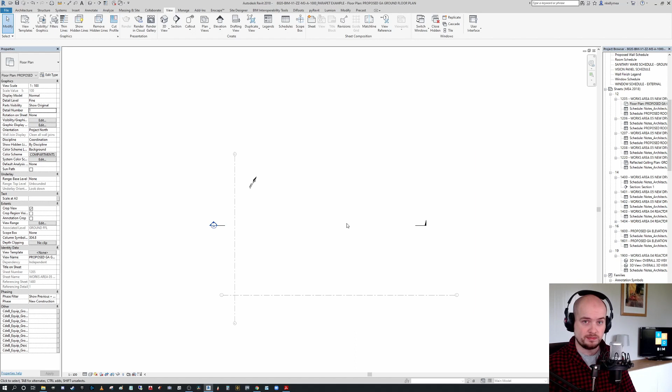So today I'm going to sit down and we're going to do a very quick modeling exercise. This is a blank file, there's nothing on it. I've just got 2 grids set up, a rough section and 2 provisional levels just to get me started. But what we're going to do is start developing out the model, and I'm going to use keyboard shortcuts for everything.

So the first thing I'm going to do is start developing a couple of grids. I'm going to press GR, okay? It's going to prompt me to save the project, of course. And you can see now that I can just go ahead and at 6 meters, pop down my first grid.

I'm going to change that to B, okay, and then I'm going to set that. I'm going to press CO to copy, and then I'm going to click multiple and create multiple grids. And then again, I'm going to press the bottom grid, I'm going to type CO.

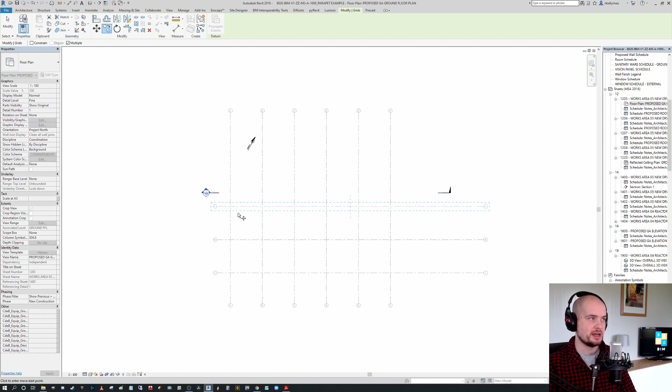Sorry if I'm looking a bit awkwardly down, I can't see around my mic. And we're going to go ahead and give it a 6,000 interval, 6,000 interval, and so on. We could see how quickly we can develop the grids. So that's excellent, now we've created a rough grid system for our project, and that was very quick altogether.

Now we want to create some associated levels. So I'm going to go double click into our section here, and I'm actually just going to click the extents of our grids up to meet the existing. And you can see that we have a number of levels here already.

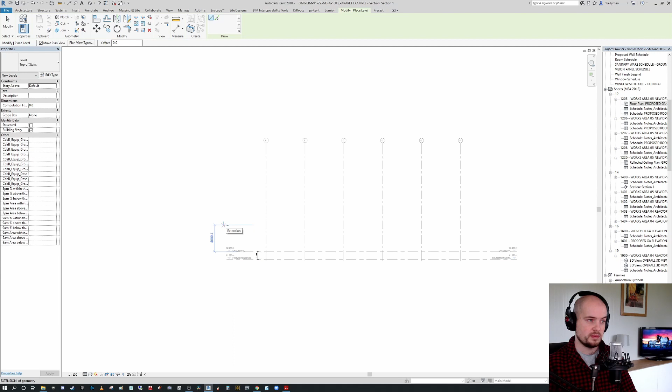So we can press LL for our keyboard shortcut, and you can see that it brings up the level top stairs. What we could do is, on our first, I'm going to press 4,000. And this has created a level for us. Once I turn on the correct level tag, you can see that this is called up. So this isn't going to be roof level, this is going to be first, let's say.

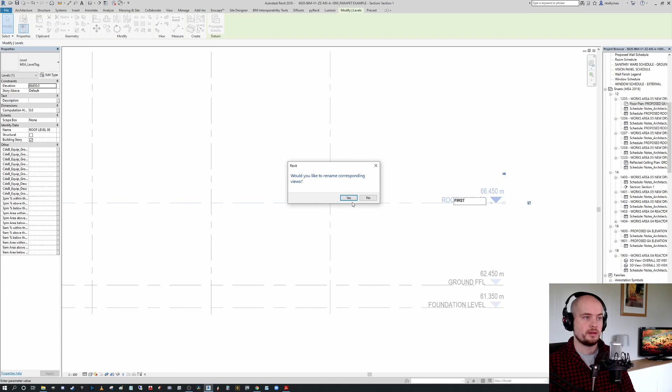And again, we're going to go LL, and I'm just going to go through that process 2 more times. I'm going to pick the right tag this time.

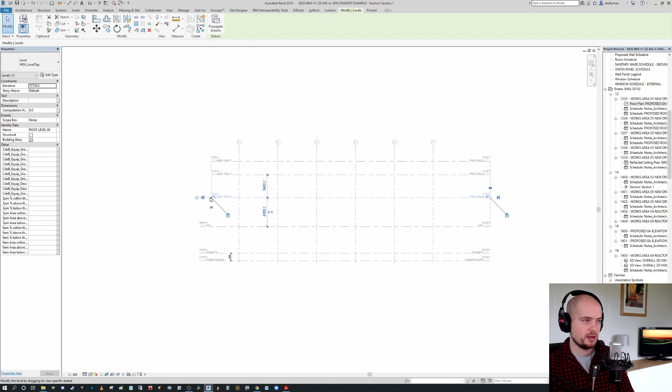I think I'll just do a parapet roughly as well. I'm going to expand out those extents there. And we're going to call this second. Name corresponding views, yes. We're going to call this roof. And we're going to call this parapet.

So you can see in a little over 2 minutes, we've created our complete project infrastructure, basically, both our grids and our levels accordingly.

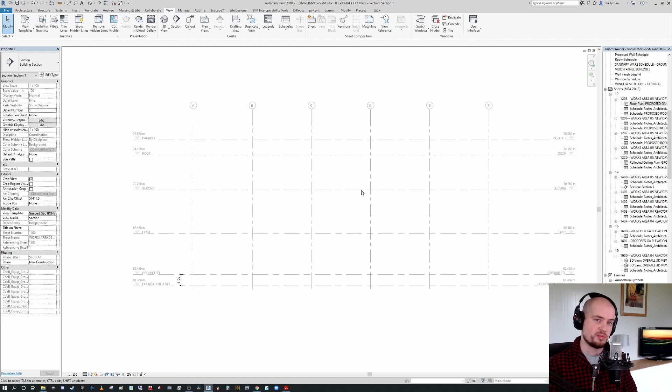Let's say we wanted to change the setting out of some of these grids, but we weren't sure what the relative setting out is. We can press DI and it'll bring up the align dimension, and then we can quickly create a run of dimensions across the grids.

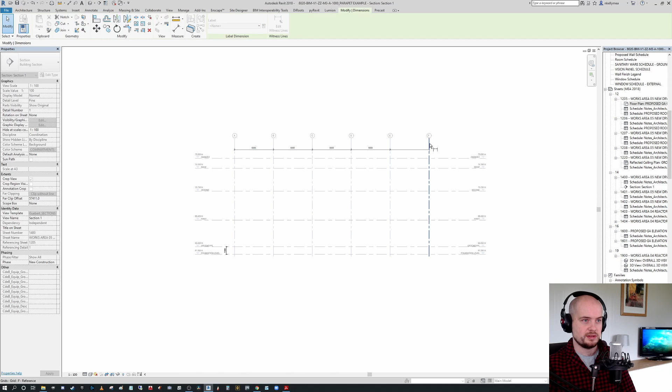Let's say I'm not happy with 6,000 there, so I can just select that dimension and change that. So you can see very quickly we can just press DI and bring up the aligned and all the other annotative dimension styles.

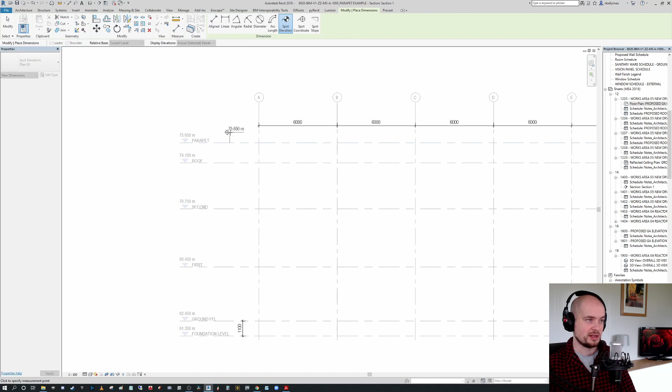We can also pop in our spot elevations as well. So I can select here and give it a spot elevation, and you can see that that's reporting the same value as the level.

So we've given our project its bones, let's say. So let's get into a bit of the modeling. I'm going to go to the 3D view here, and you can see that there's nothing visible.

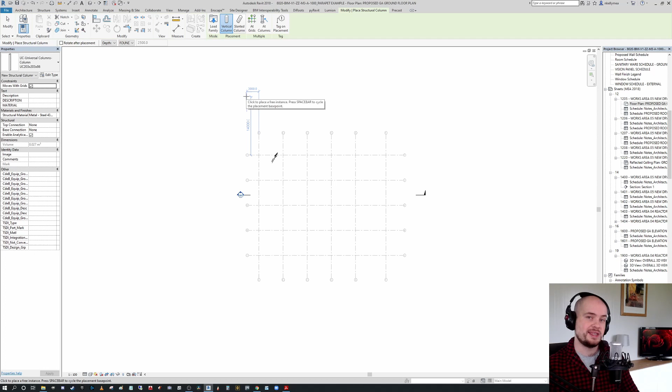So I'm going to go down to my floor plan there, and I'm going to press CL, and CL will bring up the structural column. On this, I'm going to select the column type that I want, and I'm just going to use 203s. I'm going to select at grids, and I'm merely just going to click and drag over all the grids there. What this is going to do is populate at the intersections of the grids. I'm going to press finish, and it's going to say that we haven't created any of the elements.

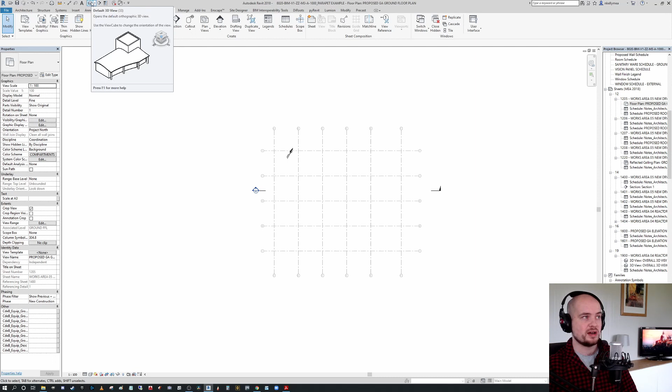The reason why is I didn't give it a top or a bottom extent. So I could go up here and press our default 3D, but you can see in a bracket after that it says 33. That's because I've given this a custom keyboard shortcut. So rather than going up into the dialog box each time, I can just press 33, and that will restore me automatically to my default 3D view.

So I'm going to select my columns here, and I'm going to take them from the foundation level up to roof level accordingly. So going back to the floor plan then, we could go ahead and populate with other things.

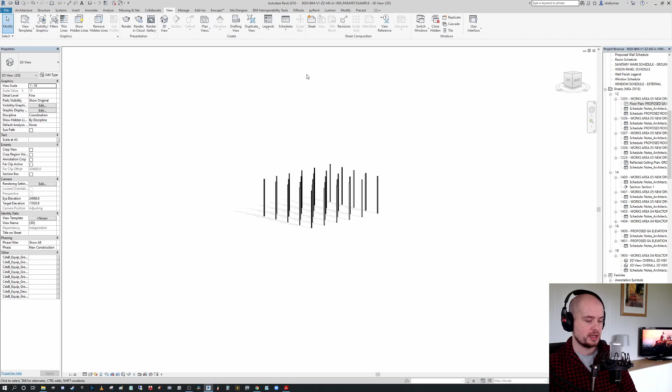So let's say going back to the 3D, pressing 33 again, I want to put in some foundations, right? So we're going to go ahead and place some foundations here. So I just want to put some isolated foundations.

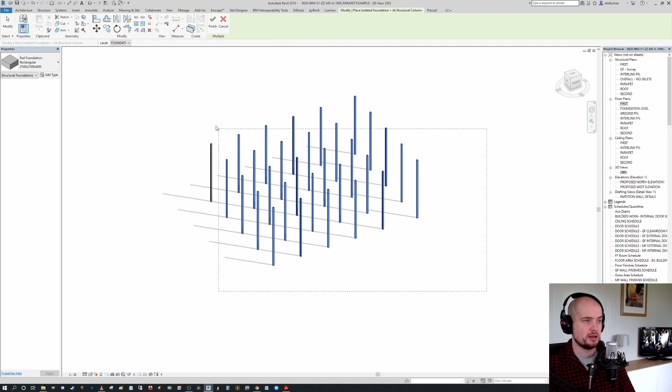So I'm going to press FN, and FN is a custom mapping. You can see that I can select at columns, and it's automatically picking up an isolated pad foundation. So I'm going to select at columns, select my columns, press finish, and it's placed it at the bottom of the columns.

Perfect. Now we want to start putting in our ground beams. So let's just say we go back to our foundation level view here. I've got some stray bits up there, my apologies, let me get rid of them. So we're on our foundation view here now.

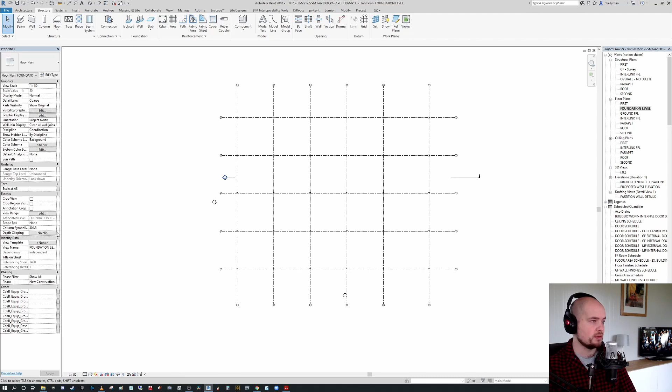And what we want to do is just edit our view range, I'm just going to give it minus 500.

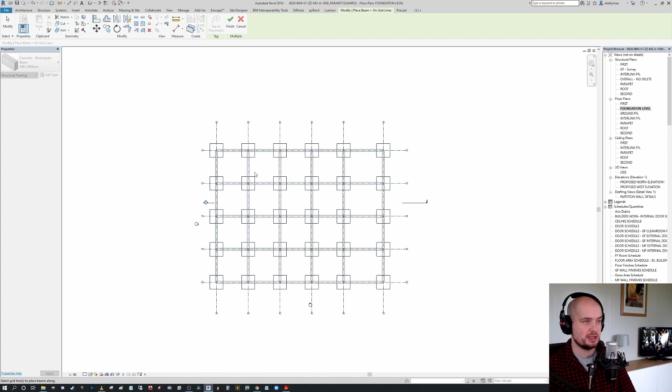Then we're going to press BM. BM creates a beam, and we're going to pick our rectangular beam there. This is a concrete beam. We're going to say on grids again, click from the bottom right to the top left, so we select everything that we cross, and you can see it automatically generates the ground beams. We're going to press finish.

You can see it joins the geometry with the concrete, so you get this very clean look. So we've got our ground beams in place, we've got our columns in place, and now we have our foundations all in place. We've done that very quickly.

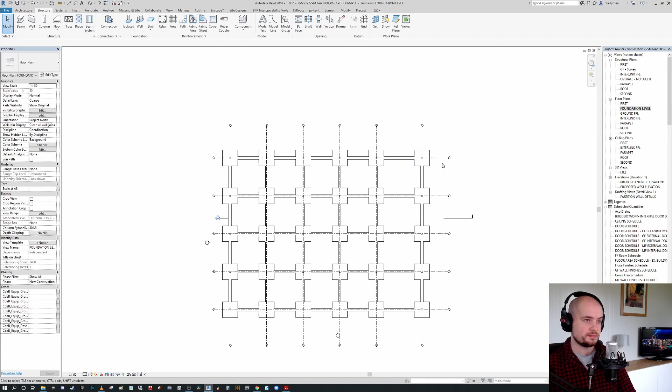Pressing 3.3 again to go back to our default. What we need to do is start populating our upper level beams. Closing that, we're going to go to our first floor. So we're on a structural first floor plan here, but let's say on our architectural or coordination plan we didn't have this floor plan generated. So I'm going to delete that.

Normally when you're creating a plan and you've got multiple levels, you need to go to View and the drop down - View, Plan Views, Floor Plan. But you can see in parenthesis afterwards I have PV in between the brackets.

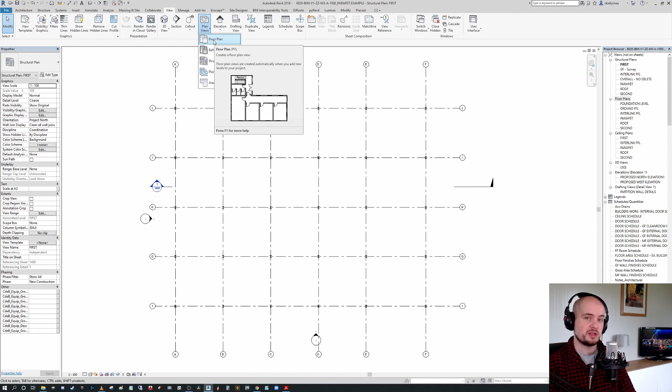PV is a custom keyboard shortcut that I've generated for creating a floor plan from a level. So I can just press PV, and it'll automatically bring up Create New Floor Plan. It'll select the level that doesn't have something assigned to it automatically, but I could turn off 'do not duplicate' and see all of them there. I press OK, and our floor plan is now newly created.

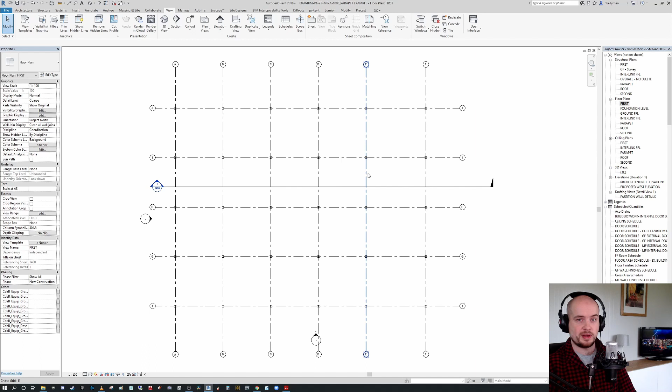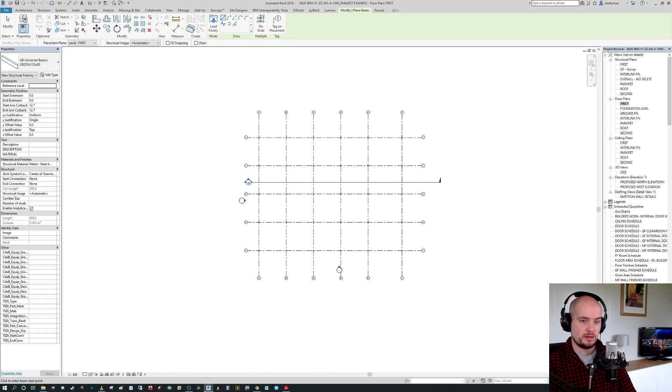So if I go to my view extents again, I need to give a minus value for these. And then we'll change that to fine so you can see the construction. So now we have our beams in place on first floor.

What we want to do now is start creating a beam system. If you go to your structural tab, you will see Beam System, and there is in parenthesis afterwards BS. But when I press BS, it's not going to generate the beam system for me. So there's something actually happening with the keyboard mapping there.

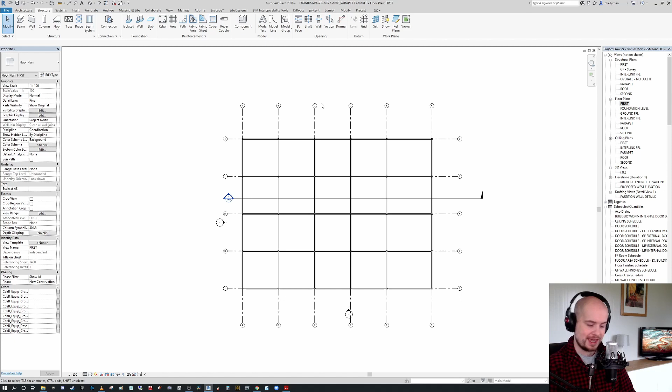To look at our keyboard shortcuts and understand what's going on with the keyboard mapping, we can press KS. When I press KS, it'll bring up all the keyboard shortcuts as they currently exist, and there are a lot of them. The majority you will see are not specified. The reason is to try focus on the 80% of tools you use most often, or the 20% of tools you use more often, so you get 80% more effective with them - hence the name of the channel.

But the idea is that you don't want to have hundreds of keyboard mappings that you have to remember for your shortcuts. Just focus on, if you're specifically working in one discipline, the default ones from the contextual menus figured out and your discipline-specific ones, and you'll probably be good to go.

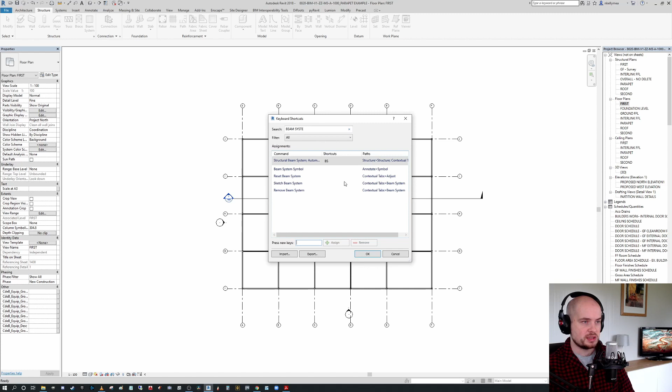So looking at this now, I want to type in beam systems, and you can see that beam system, our automatic beam system, is not getting picked up. So it is saying BS there, but it's not showing the tool. When I press BS again, you can see it's actually not picking up the tool. So there's an issue with the beam systems, and I just wanted to flag that very quickly.

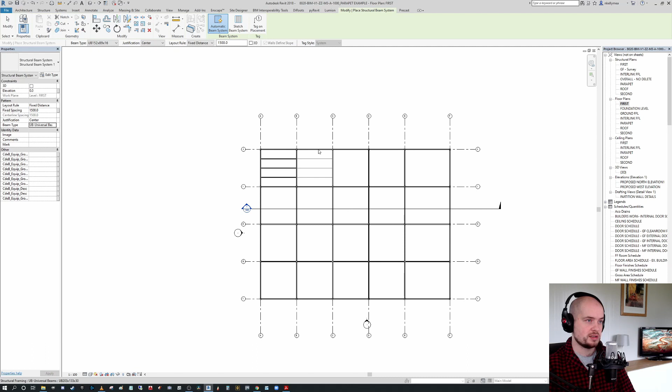So I'm going to press Beam System, I'm going to press Automatic Beam System. I'm going to set the fixed distance to 1500, and we're going to set our beam type to a 152. And we're going to go ahead and just start populating our beam system, and you can see how quick this is.

And apologies, I hit a duplicate there. We're actually populating our entire floor deck here very, very quickly. So now we've created our entire floor, and I believe that this beam system was the duplicate, was it? No, no.

Sorry, this is me being a little bit... okay, we have a duplicate in there, forgive me.

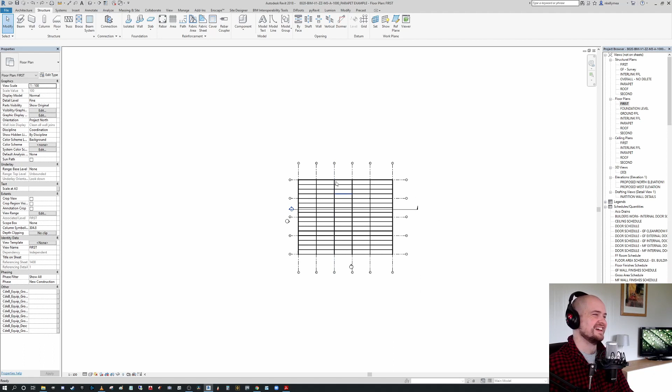All right, so now that we've created a rudimentary floor, we can go, okay, we want to array this up the various levels.

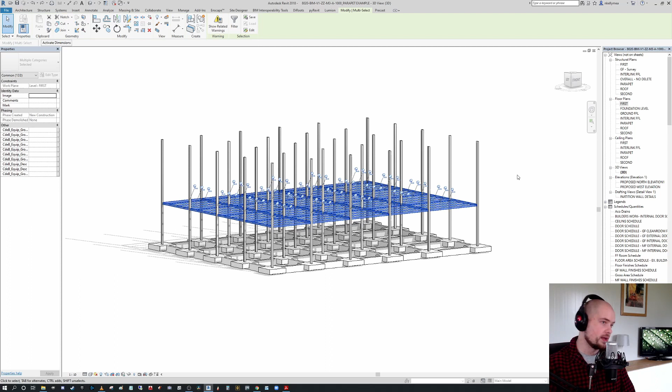Going to our 3D view, you can see how quickly we're modeling the geometry because we know our shortcuts. I can press this, click and grab this, and press Control-C, which will copy it to the clipboard. And obviously, we all know that when we go to our Modify tab, we can go to Paste.

We can say align to selected levels, align to same place, align to pick levels, all that kind of stuff. But what I want to do is create a custom mapping again, and align to selected levels in this instance.

So I'm going to press KS, and say Paste. We're going to say paste, align to selected levels, current view, pick levels, align to selected levels.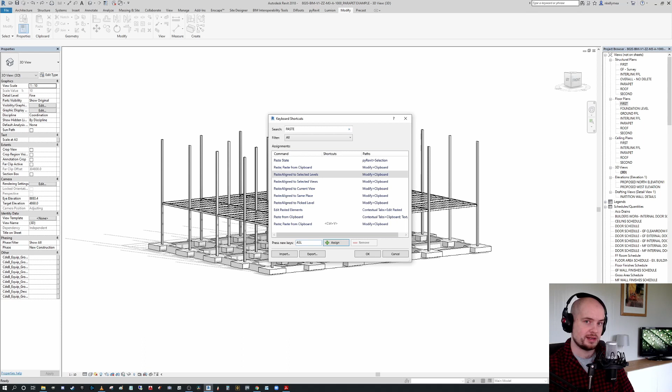I'm going to use a 3-letter shortcut, this one. I'm going to call it ASL - align selected level. I'm going to press assign and press OK.

So now I can press ASL, and it'll bring up the levels that I want to copy what I already have to the clipboard. I'm going to select our second floor and our roof for argument's sake, and press OK. I'm going to give it a moment to generate.

And that's where the duplicate was, up here. No, sorry, I have to go and get rid of all them now because that's going to bug me.

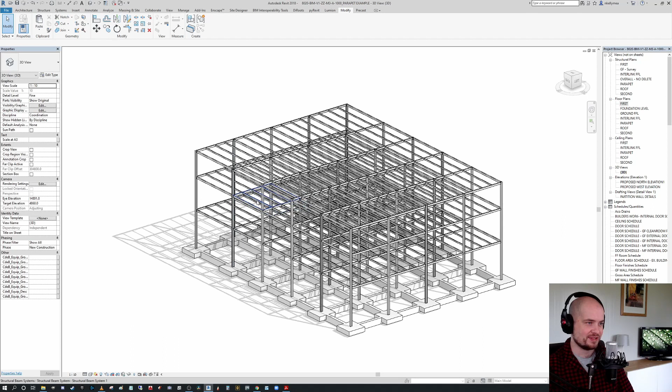So you can see how quickly we're beginning to generate all this information. Now that we have a very, very rough and ready structural frame together, it doesn't have a core, so it's going to need bracing.

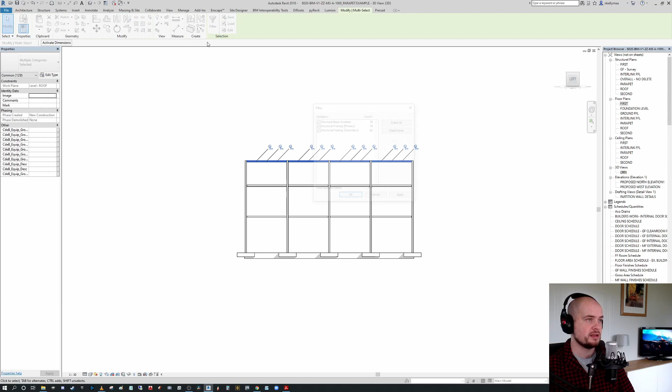So I'm actually going to go up here, and I'm going to create a selection here, and into my filters, I'm going to check none, and select my beam systems here. I'm going to press apply. Oh, sorry, we'll do that again.

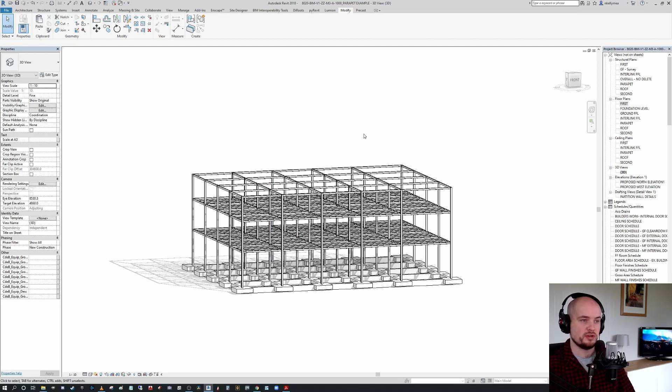Lost my selection. I'm going to filter, check none. I want to keep the beam systems. And I'm going to delete them, because obviously at our roof level, we don't have a floor deck like that.

What I'm going to do is turn on the section box here. Might be hidden in view. So I pressed RH to open the reveal hidden dialog. I'm going to unhide element, and then press RH again as a keyboard shortcut. We're going to spin around, and I'm just going to crop that up as such.

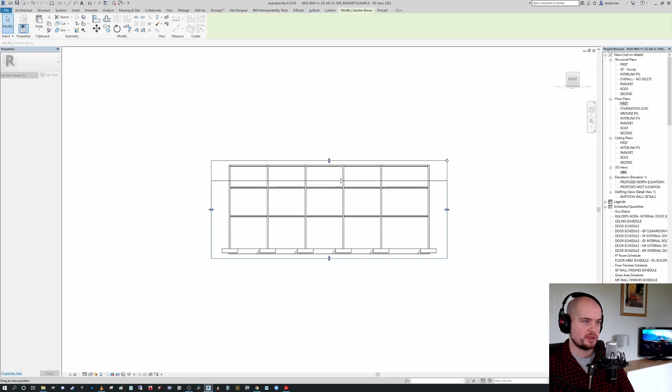Now what I want to show you is some of the snaps. If I press B, it's going to bring up a universal beam, but you'll notice we are in the modify place brace. So it'll call up the same structural framing members, but I'm actually placing braces now.

Here I'm going to scroll down, and hopefully I have a suitable member. I may not, I may have to use just some generic member for the moment. What do we have? We got PFCs. Oh, I should have L angles in here, but look, don't worry about it. We're going to use a small PFC here.

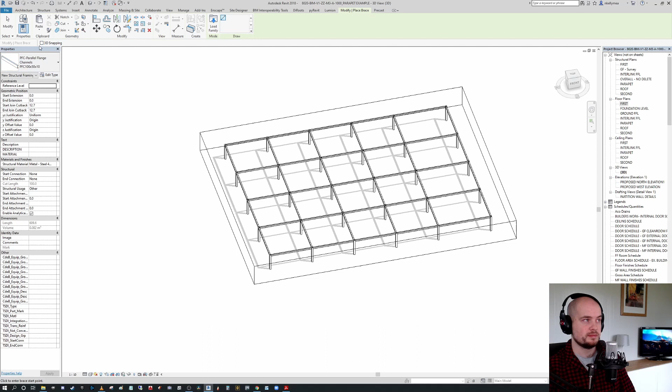What we can do is turn on our 3D snapping, and I'm going to show you how we can use our snap endpoints. So getting braces to snap can be particularly tricky. Sometimes when you're going up the vertical outside face of the building, it can be a real nuisance.

But what you can do is, in 3D snapping, it's going to pick up the analytical line at the top of the beam, but you can start using your snaps, and you can tell Revit which snap to connect to. So I'm not positioned anywhere on that beam really, it's picking up nearest.

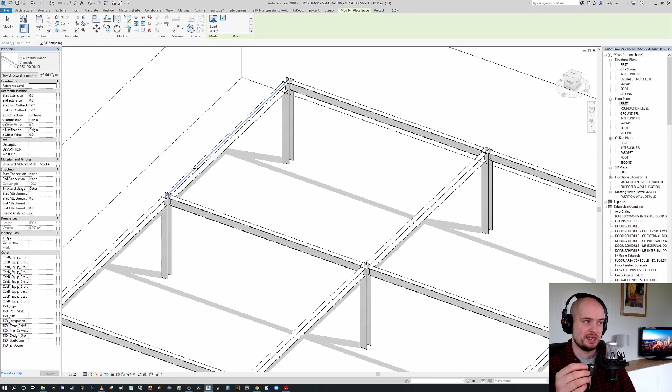But I can press SE, and you can see it'll snap to the endpoint. So I can press there, and then go over here again, let's say I'm going to pick up the column. I'm going to press SE, and it's going to snap to the endpoint of the column. Similarly, we're going to do the reverse here and here.

You can see that as I'm going along, I'm picking somewhere in the midpoint, like along the analytical line, but it's automatically, because I told it snap, going to pick up the endpoint. It doesn't matter where I'm positioned on that.

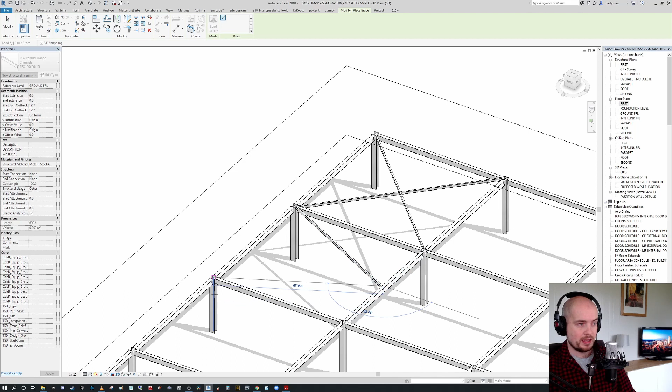If I press SN, it'll snap nearest again, and it'll follow my cursor. So I press SE to snap to the endpoint again. Now we know our braces are in plane and attached to the nodal connection at the top of the columns. This also works for midpoints. Let's say we have a K-brace. I'm going to press B to brace again, snap endpoint, then on our beam I'm going to press SM to snap to mid, then press SM again, and SE. You can see we can start generating our braces very quickly, going SE, SE, SE, SE, without tinkering around trying to force the connections.

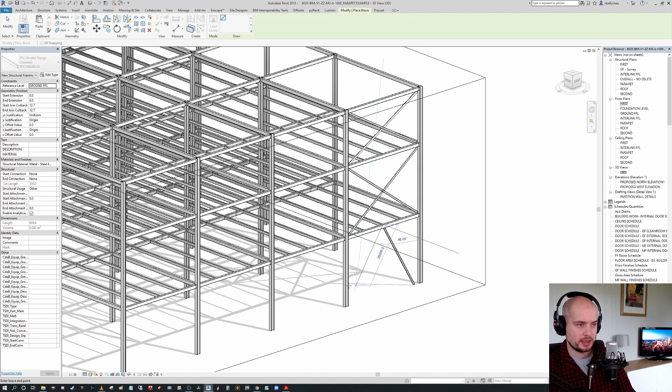The case will remain true in the vertical plane as well. So if I go brace, I can press SE, SE, SE, SE, snapping endpoints all the time, becoming very efficient. I can press SM on the beam, SE down to found, SM on the beam again. Apologies, SM and SE. Sorry, there we go. Now you can see we have bracing in place. Obviously this bracing arrangement is rubbish, but you get the idea.

You can see how expeditious this modeling process is once you understand your various keyboard shortcuts.

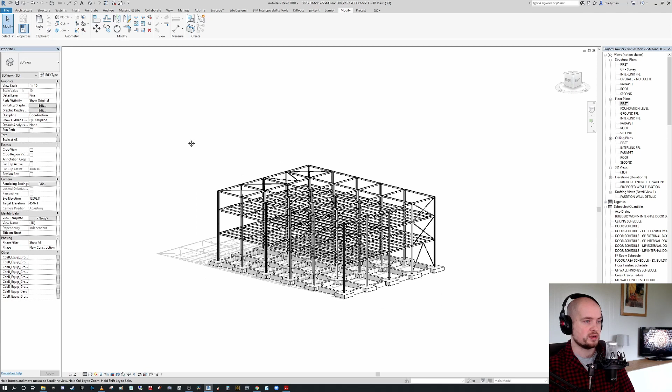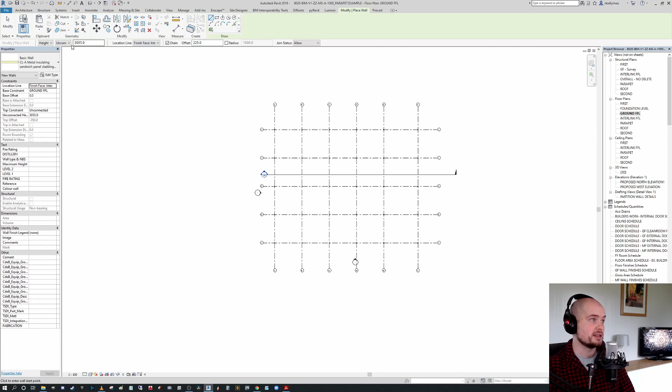Moving on from the structural side of things, I can go to our ground floor and press WA for wall. I can say finish face interior. I can give an offset value, let's say 225, just to allow for our cladding rail depth. I can set the height up to our parapet, and basically click the outside of this column.

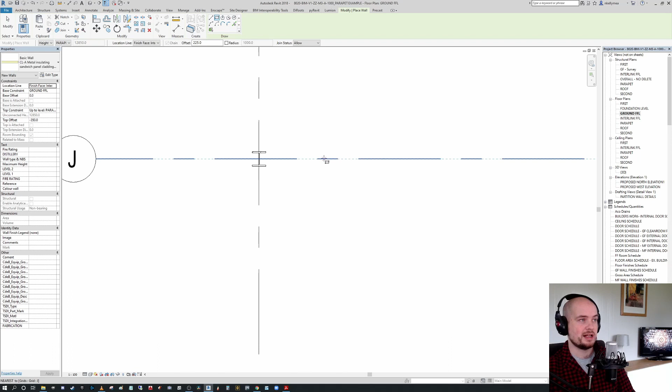I'm actually finding it hard to see where the edge of that column line is. So first things first, I'm going to put it on fine, and secondly, you can see the lines are quite thick, so I'm going to press TL, which brings up the thin lines format, so you can see the connection and geometry far clearer in the modeling environment. Pressing TL again will reverse that.

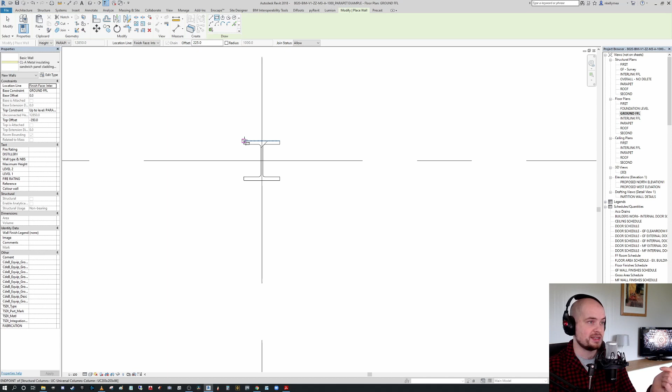So this is your print output, and this is your modeling view, which is more desirable, so you can pick up your endpoints very easily. As you can see, we can quickly generate that wall all the way up to parapet, and now we've encased our building.

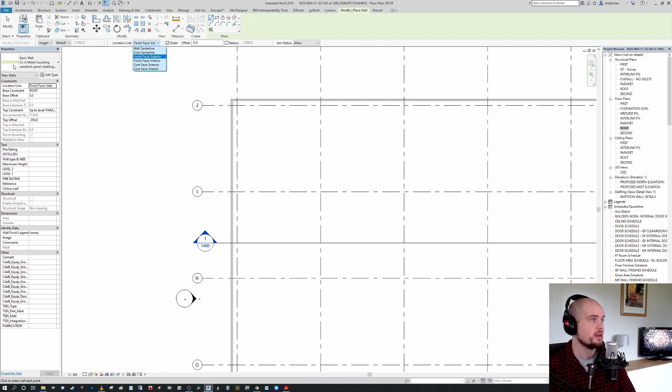Outside of that, I can go and do wall again, up to our roof level. I'm going to press wall again, WA, say finish face interior, then finish face exterior. And I'm going to go down to... give me one moment, we'll see if I can find something... internal parapet. There you go.

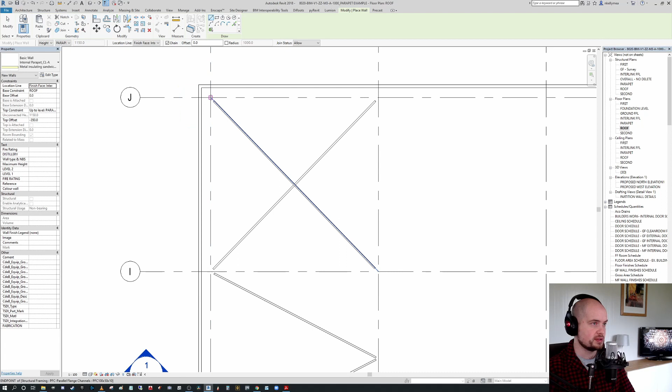I'm going to go to finish, and here I'm just going to select... I'm going to press the space bar to flip that orientation to here, for argument's sake. Then I'm going to do that. Now you can see I've got a full parapet construction already generated by just using 2 WA keyboard shortcuts.

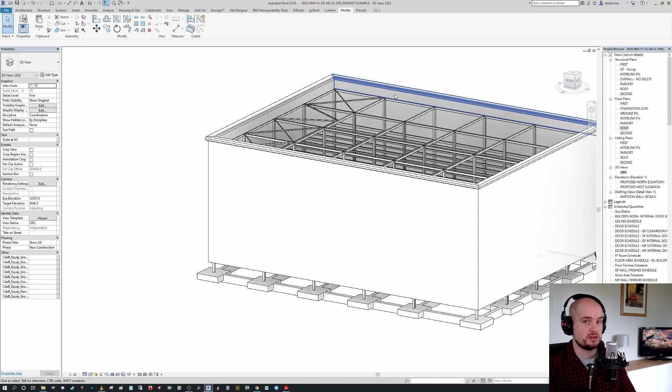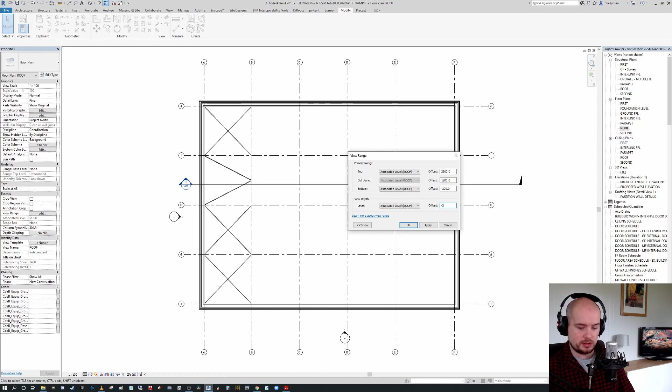Now there are other keyboard shortcuts that aren't accommodated. So going back to roof, if I went to roof and gave it a view range, my apologies, let's say -200 and -200. The reason you're seeing those braces is they're aligned to the midpoints and not the z-axis, I believe.

So I can come in here and press VG, which brings up the visibility graphics, to maybe hide the walls. Then I'm going to go down and select walls, pressing WA. Now I could go to Architecture, Roof by Footprint, or I could just press OR-F, one of my custom shortcuts, and it'll automatically bring up the roof by footprint.

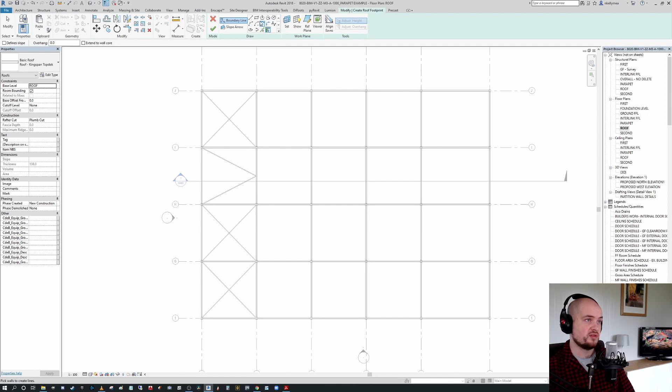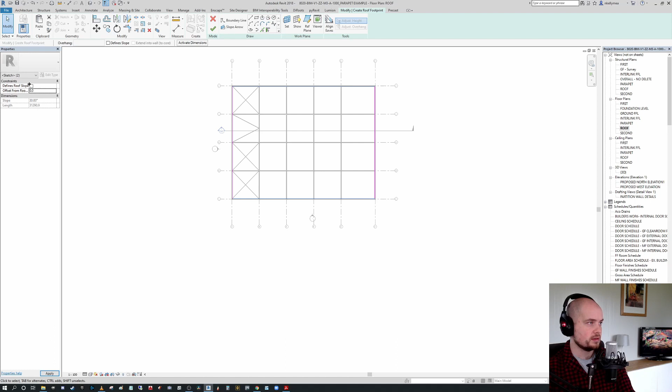Now I can just come in here and draw a roof very quickly, very rough and ready. I'm going to turn off these as defining slope, which define slope on either side here, and we're going to give it a slope of 6 degrees. One moment. 6. And we'll press finish.

Now we've got our roof, and 6 degrees may be a bit aggressive, so I'm going to go down here and just change it to 4 degrees. Now we've got a fully enclosed building with a structural frame. Similarly, we can go back to our ground floor, let's say.

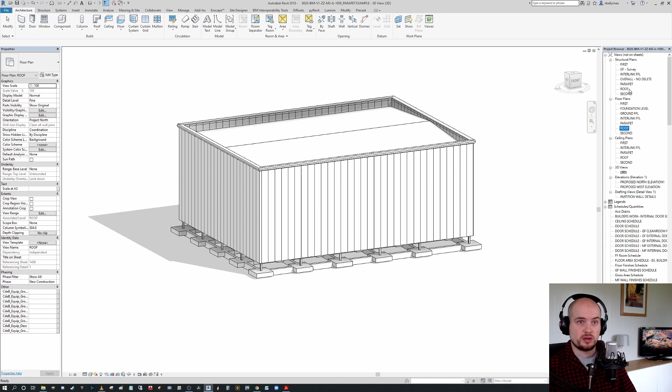I can press WA and select an internal wall type, like a partition, and start loosely populating some walls throughout the building here. Bearing in mind, obviously, that this is not a design by any stretch.

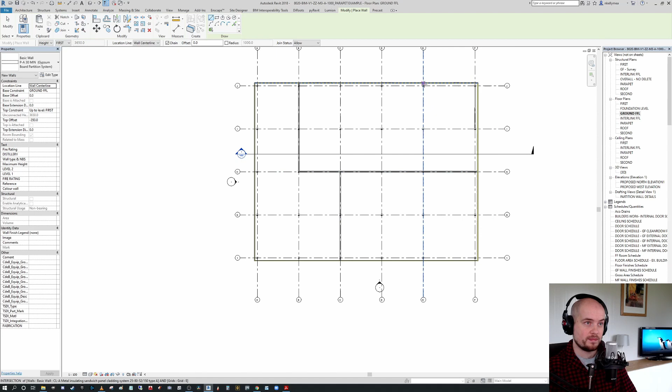Then let's say I wanted to place a couple of rooms. I can press OR-M, and you can see that it'll automatically start placing rooms. So you can see I'm not going around clicking the architectural tab or navigating through everything. I can literally just select and go.

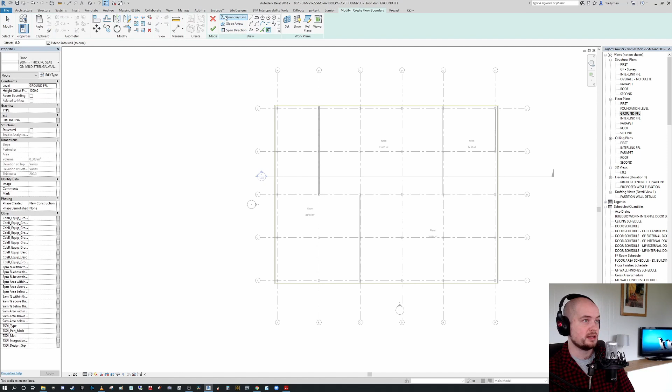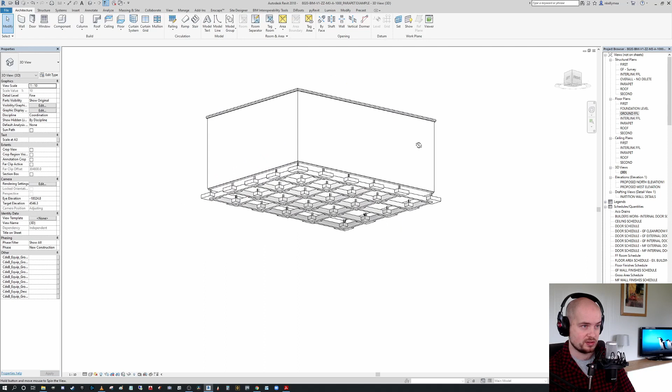Finally, I pressed FL, and that's brought up floor. Now I'm going to pick walls, tab select the boundary walls there, press finish, and press no. So I've got a floor in place now. You can see how quickly I'm getting through this modeling exercise throughout the project. It's very, very quick. I'm just going to change that down to 0 there, just to make sure it's correct. This is really, really quick to generate the information.

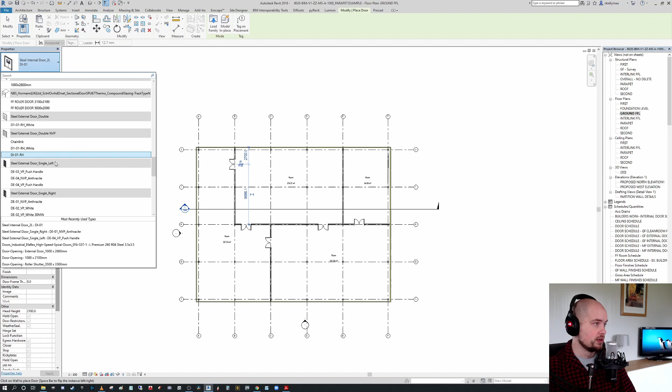Going again to our ground floor, I can press DR, and it'll start populating doors throughout very quickly. I could change that to some sort of external. Let's say I'll give it a rapid roller door on this face and on this face, and I'll give it a couple more.

Then I can go down again, press WN, and start bringing in windows. So you can see I've got viewing corridors. Let's say we've got viewing windows here, so I can press viewing window there. These are vision panels essentially. You can see how expeditious all of this is.

And I can go up here and press it all the way throughout. Obviously you can be quite a bit neater, but you can imagine that if picking the tool was one fifth of the time of actually implementing the use of the tool, then you're looking at a 20% efficiency gain. So that 13.36% estimate by the community is actually probably quite close to the true value of how much production gain you get. You can see just how quick all of this is.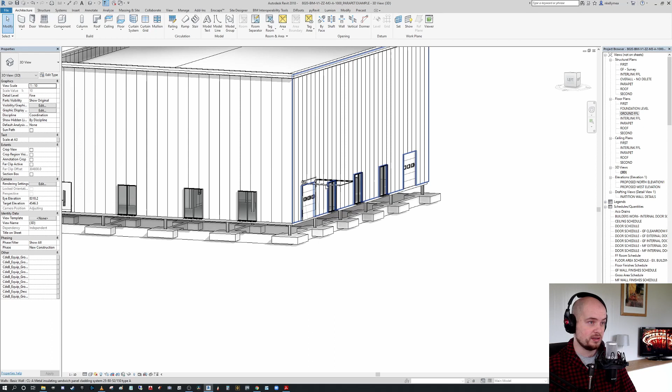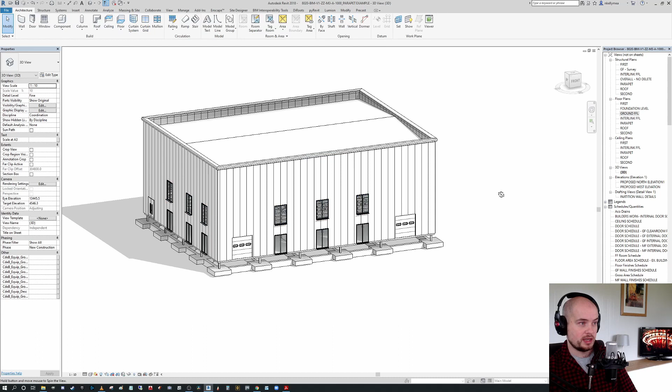We've got our building basically up and running. Again, I can select these, press SA, and then Control C. Then I can press ASL, and go to the first floor. Now we've matched our windows to our first floor. Again, ASL, and I'm going to go to second floor as well. So you can see just how fast this becomes if you learn your keyboard shortcuts correctly.

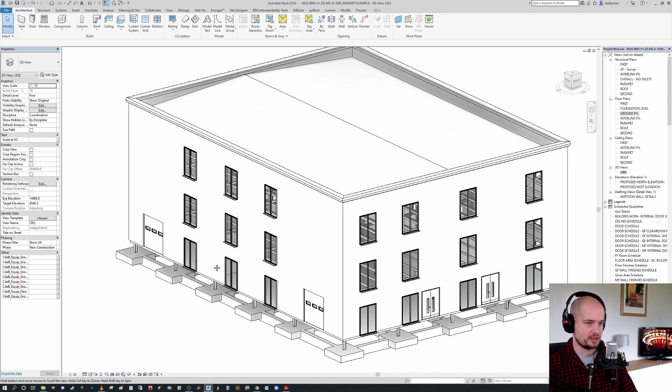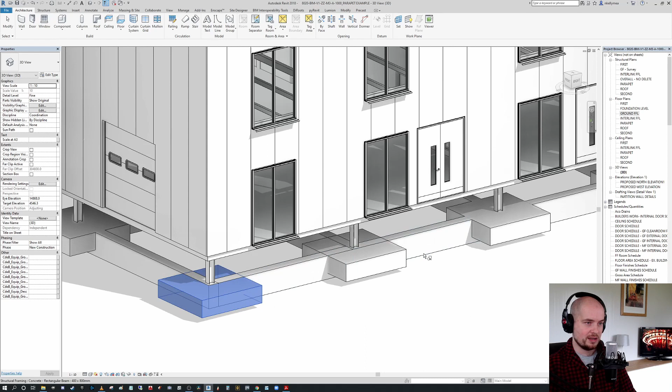A few of the other custom ones I particularly like: I use UJ to unjoin geometry, and you can see I can press this and this and this, and all these members, even though they were joined, have been given an unjoin condition, so now the materials are not amalgamating, they are separating. Again, I can press JN and just go ahead and start joining that geometry again, and everything becomes quite neat and presentable again.

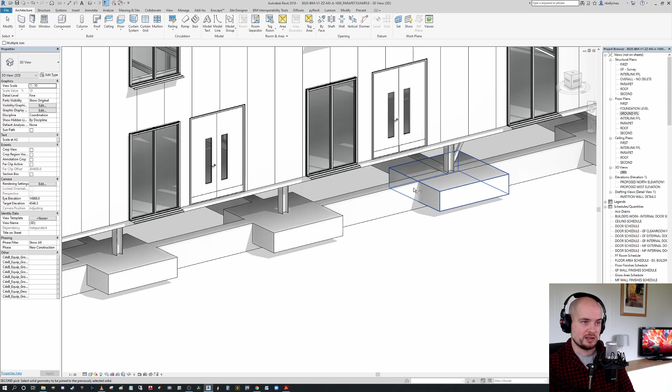You know yourself, you might have a rising wall detail or something like that, which is obviously absent from this model currently, but typically they need to merge with the footing materials and that kind of thing. So it's just a way of neatening up your presentation.

There's also other things like on the ground floor. If you press DL, it'll bring you into your detail lines, so you can start drawing detail lines—not that I recommend you ever draw detail lines in a plan view. Outside of that, you can also press TG, and this will bring up a multi-category tag, so you can just go around and start popping your tags. These are picking up the fire ratings on the doors, because these are 30-minute fire ratings.

You can start seeing that it'll pick up the window specifics. It'll also go ahead and pick up the wall tags accordingly. So you can see how quick this whole thing can become.

Again, pressing DI for our dimensions, we can literally pick an entire wall if we wish. So I can say entire wall, and on this I can give it all the intersections as well as the widths. Press OK, and by pressing DI and then selecting each wall, we can get a full setting out of each wall relative to the grids, relative to the adjacent walls, as well as all the elements within the walls that are hosted, such as our windows and doors and that kind of thing.

So really, you know, the proof is in the pudding. You saw how quickly this exercise has been from start to finish. I've been doing all of this modeling already merely by just knowing the keyboard shortcuts.

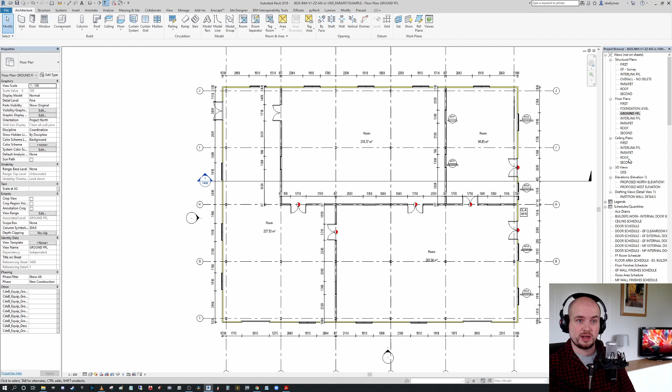Again, I can go into our ceiling plan. So if I go to my view and I go to plan views, I want to go to a reflected ceiling plan, and I'm going to create a reflected ceiling plan for our ground floor, finished floor level.

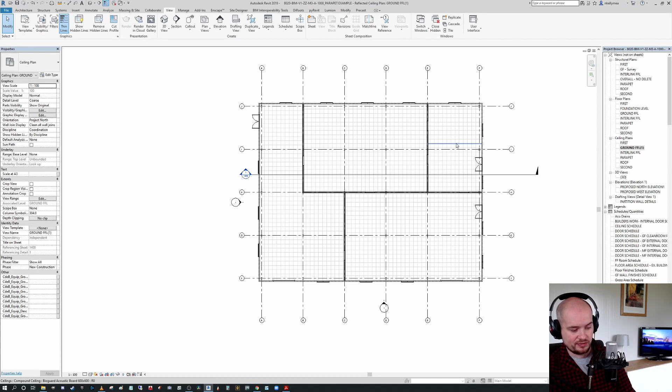And here I'm going to press CE, and you can see it brings up my automatic ceiling sketch, and I can pick the ceiling that I want, and it'll start to populate the ceilings throughout. And again, if I want to tag the rooms, I can press RT for the room tag, and it's going to pick up the rooms that are already there. And now I can press TG, and it'll give me my ceiling tags accordingly for my ceiling types.

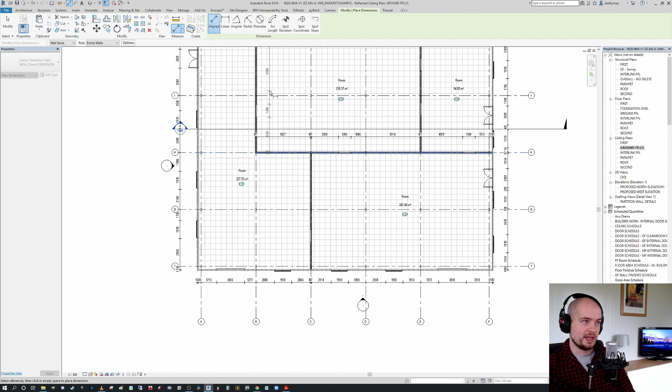And again, I can go ahead and press DI and start getting all the setting out information that I need very quickly by selecting the full run of the walls. So again, the proof is in the pudding. You can see the benefit of our keyboard shortcuts.

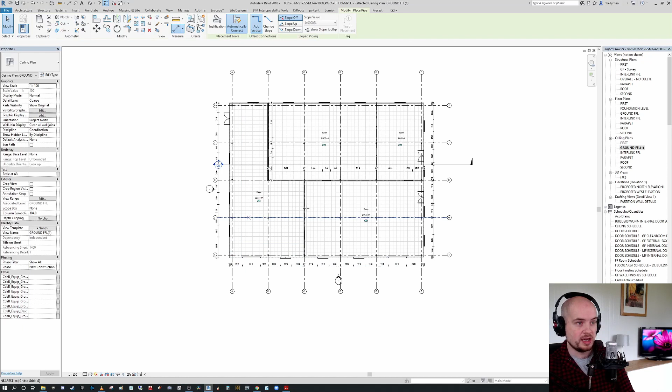I just think not enough people understand how to do the systems modeling, so I prefer putting that in the views subheading as well, so other users from other disciplines become familiar over time. So again, just to give you an idea, we can press PI and it'll bring up our pipe modeling window as well. That's an idea of a systems shortcut.

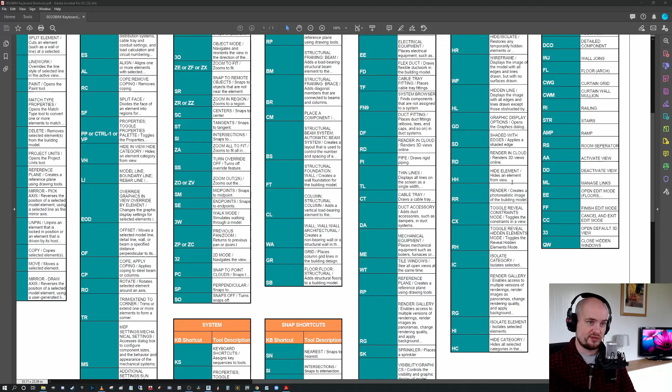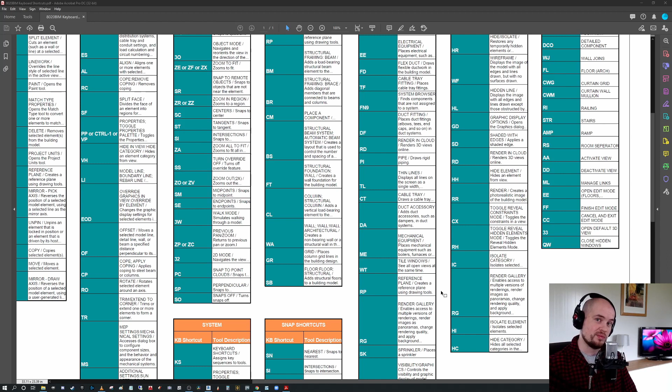This is an example of how efficient you can become with your Revit shortcuts. I cannot recommend them enough. You won't know yourself once you're familiar with them. It really is, I think 13.36% may even underserve it, depending on your efficiencies in other aspects of Revit. But both students and professionals, but certainly professionals, they should know their shortcuts without a doubt.